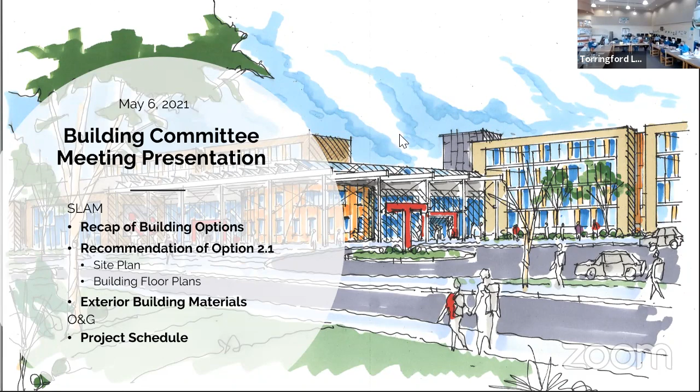This is a reminder of where we left off at the last meeting two weeks ago. We had talked about option one, which included a new field house style 3-bay gymnasium, and how that worked with the site, challenging us in that we would have a 2-phase construction period, and during that construction you would lose the space to have PE class.

So we also looked at option 2, which is a very similar layout of the building, but where the building ties into the site, we're able to incorporate a renovation of the existing gym structure and shell, and we would completely renovate the 2-story locker room area as well as the gymnasium. That would allow for a new middle school gymnasium to be built as part of phase 1 construction.

And while the remaining gym area, which is for the high school, is under construction, the high schoolers could use the middle school gym on a temporary basis.

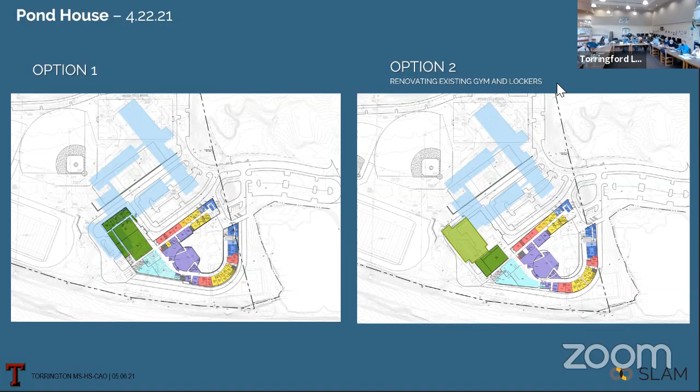We did our due diligence though. We didn't just simply go with option 2. We took a look at the site and how the buildings relate to the elevation and the grading, because site work will be a major part of this construction, in that the existing gymnasium and the existing main floor are at one level. The parking lot is lower, and the pond area is even lower.

So we'll have to really be careful about where to site the building in elevation. We looked at option 1 and tried to discern how much cut and how much fill there would be on site work if we were to put the building in this location. The first study had it at one level, and the other had a 2-story, sort of stepped version of the main level, but kept all of the building program on one level, stepping down between the middle school and the high school.

We then looked at similar options for option 2, saving the gym. This is a bit more challenging because the gymnasium is up at the high point, at about 672 grade elevation, and the pond is at 658 or so.

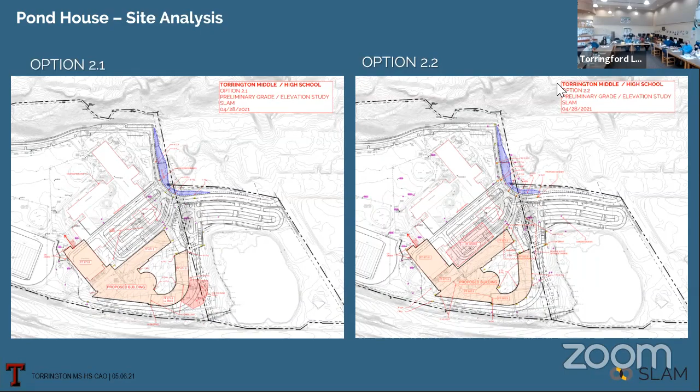Whereas this one, we're raising it up 6 feet and reusing the gym. By doing that, we're able to capture some lower level space in the high school wing, which uses the topography of the site more efficiently, in my opinion, and allows us to reduce the footprint of the high school wing, giving a little more efficient vertical construction.

But the size of the gym remains the same, correct? That's correct, as it is now. Well, which everybody really loved. Because we're adding a second gym, so to speak. If you take all the gyms—but that's for the middle school—the high school portion of the gym remains the same. Yes, the middle school is extra.

Just the only other thing I want to say is I respect everyone's opinions, but we are representing everyone in the community. And like the pool that we've never stopped hearing about, I would like to at least have a rational explanation for why we chose to renovate the gym versus a field house, because there are going to be a lot of people in our town, Torrington, that want a field house.

So I think we just have to clarify the terminology of field house. Because a true field house has a much larger presence and includes a track. This would not be a field house — this would be 3 gyms put together. It would allow more flexibility after hours, but it would not be a field house in the true sense. Let's be clear, 3 courts.

We should just stop calling it that. Let's stop calling it a field house, because that was probably our mistake — we started calling it a field house. Let's not call it a field house.

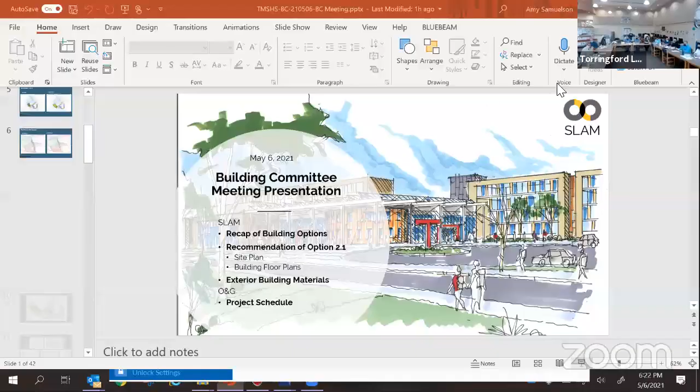Oh my God, you see the little piece.

Which photo do you want to start with? So I have a question while we're waiting.

You said the art and the ELC or pre-K is going to be on the bottom, but you also said no windows. There's windows in one direction where the grade slopes down, facing the pond, there's lower grade. And when they're in the corridors or courtyard, it's different. Maybe one of these other images can help explain that.

We'll get to this at the end. Facing the pond, there are windows. And on the courtyard side, in the lower level, it's a basement wall, so you only have windows on one side. The occupied spaces are the things that have windows. The core can have windows on the lower level only, on just that little lower piece.

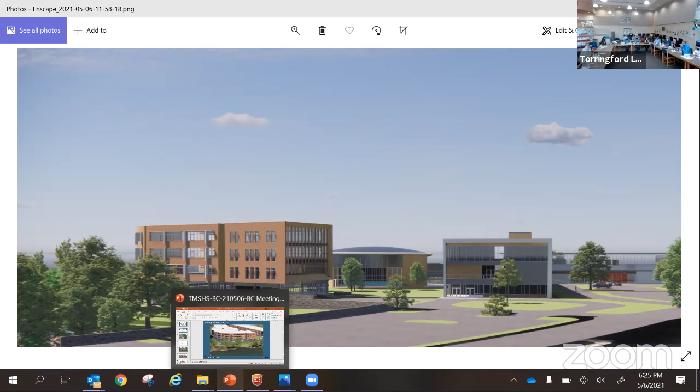We've started to see a facade developing for the building, and we brought some exterior materials. We're really thinking about using brick as a base material, a field material, so most of the school will be brick, with some wood composite laminate for wall accents to warm up the entire palette, and some different cladding material maybe for the lower level to differentiate it.

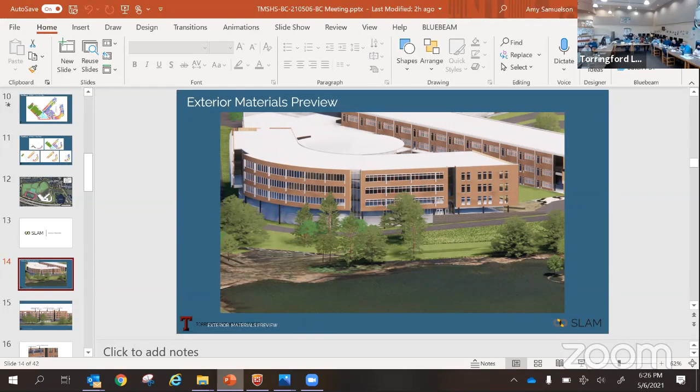But where's the wood? You'll see it in those recessed areas. We were thinking about wood where we have a recessed area with stairs. It's a laminated, graffiti-free and maintenance-free material.

We're providing windows in all classrooms and all offices. Some will be repetitive for the classrooms, and offices will be slightly different. But stairwells will be vertical elements with glass, so whenever you're going up or down floors, you'll have a view of the pond or surroundings.

Just a close-up on the detailing. We're thinking of placing a sunshade on the southern facade, just to protect from glare and sun, and adding some vertical elements to articulate the window openings more.

This is still in the making, we're still working on the facade, but this would be the view towards the courtyard, where you can see the auditorium, middle school main entrance, and high school main entrance. We're still thinking of having maybe a NanaWall or some way to open the stage so students can perform there, with an audience outside, or the community can be in the courtyard and listen to the concert. Yeah, that's a nice idea.

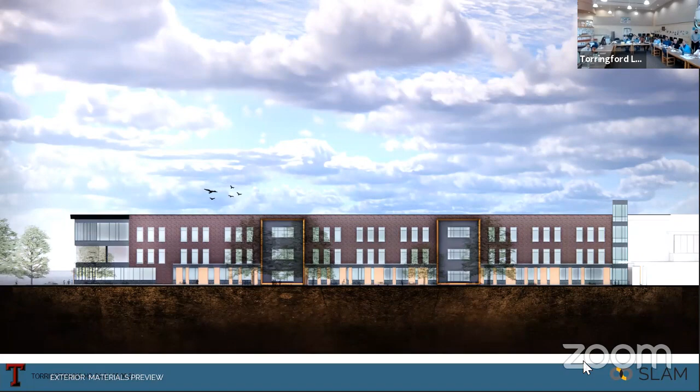These are some variations and explorations of the facade for the middle school with brick and some vertical elements, since we've been very efficient with those, having corridors and classrooms around. We're trying to make the facade more playful. This one looks at the facade clad in a different material, so we'll still look at a few options.

Possibilities include differentiating the middle school and making its facade slightly different from the high school, or making the whole campus more coherent with a similar treatment for everything.

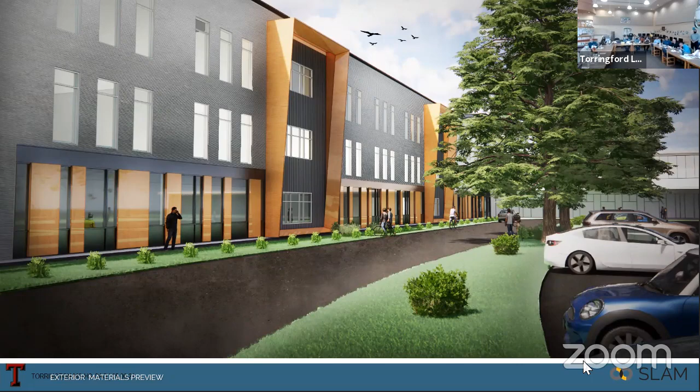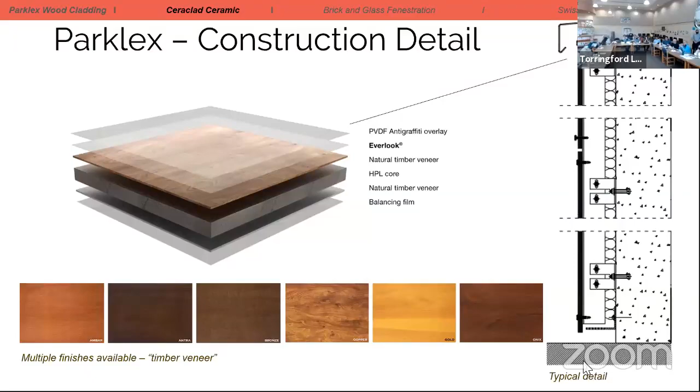Just a few perspective views of this facade that goes toward the gymnasium and community entrance to the gym. This one uses brick and some wood elements, materials we brought here. We think a play between warm and cool materials might be nice. Just a note on method of installation and warranty. We're trying to keep it simple, with a few materials on the facade, but to make it elegant and provide plenty of daylight and views for all classes.

Do you have any reactions to some of the materials we're looking at? Is there a comfort level with brick? We see it a lot in town, and on the other buildings. I personally like brick, I think it's beautiful.

Do you feel comfortable that we have enough budget scope, or that if we're off on budget we don't have to take things away? Is O&G carrying square foot cost to reflect the skin on this building? We're using materials we've selected in conjunction with O&G. We talked to them this week, and found brick to be the most common material and a good starting point. Since most of it is brick, we feel really safe.

Beautiful, at least I think so. My only concern with brick is the refacing we always have to do. That's just because of the age, like the Migeon Avenue brick structure. The whole project is probably 50 to 100 years, and it probably hasn't been repointed, plus the rain, and there are no gutters.

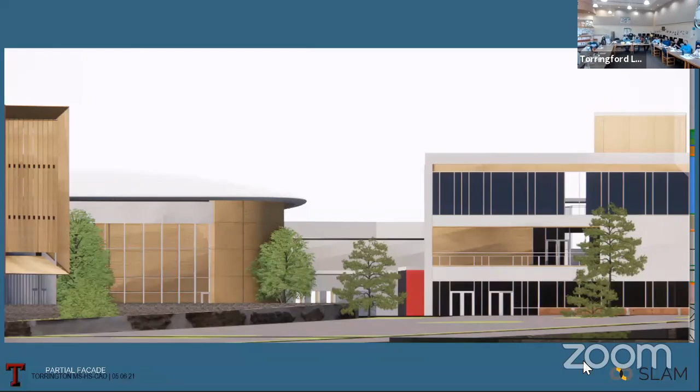I know, like in the building we're in now, there are so many entry points—God forbid anybody ever wanted to get in. So safety, I know we talked about it a little, but we're going to have a separate security meeting. It's on the agenda, so we'll talk about that.

In general, we are minimizing the number of entrances to the building. We'll just have egress per hall, but when we say the atrium can access the lower level, it's through the stairwell doors—we won't have doors on each classroom. The security areas are at the main entrances, where we have a double security vestibule, so nobody can pass straight through; they go first to the office. Yeah, I'm thinking of the worst case scenario.

The building has been designed in accordance with SSIC guidelines. We'll have more detailed discussion at the security meeting about the details of the glazing and some of the access control issues, like access control and security cameras.

So in the recessed areas, there's no windows on the side walls. But on the front there's a window wall. Anywhere there's a recess, there's no windows on the side walls, because if we have front glazing on a stairwell, we cannot have windows next to it because of fire rating. Those are egress stairs, so we can show you in the plan.

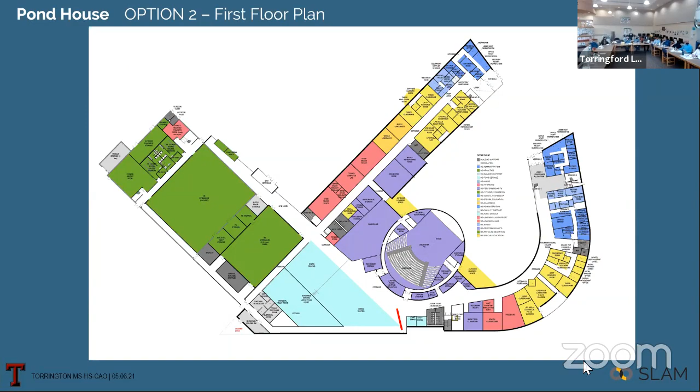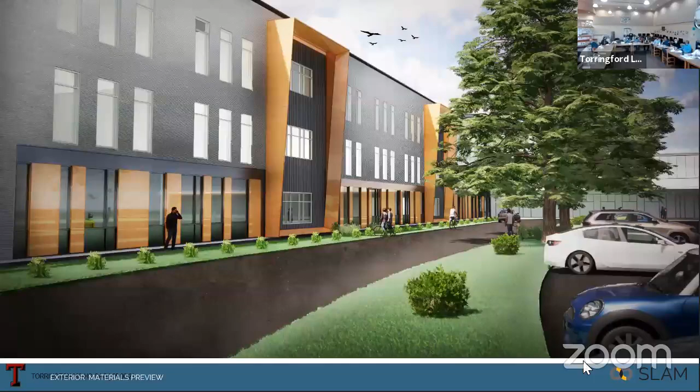Just to clarify the difference between Hardie and what we're suggesting: this already comes pre-coated with a ceramic coating, so it's much stronger. You don't need to repaint it on a regular basis. But versus the brick, in 25 years will we have to replace that? Will it be worn out because of mold and mildew? I have to really look at it, I just don't know.

Does that mean they will replace it within a 20 year warranty, and after that you will have to do it yourself? The warranty is probably for the finish, right? Yes, just the finish, but this will last more than 20 years. The warranty for the substrate is 50 years for this product, the Ceraclad, which is the commercial version of Hardie, and then 20 years on the finish. So potentially you could refinish it, but I'd have to ask the manufacturer. It also depends on the environment - where is this built, what's damaging the finish? If you were down by the shore and salt water was attacking it, it might be a shorter duration than here.

So that's why, like, placing wood in a recessed wall, it's less open to rain and things. So that black one - it's actually gray, that's the outside?

Yeah, this is Ceraclad, and that's just one option. It comes ridged like that, it comes flat, there's a number of options and colors. But only gray? No, it comes in white too - I think there was a white sample that we passed around. Yeah, there's one here. It comes in a range of colors.

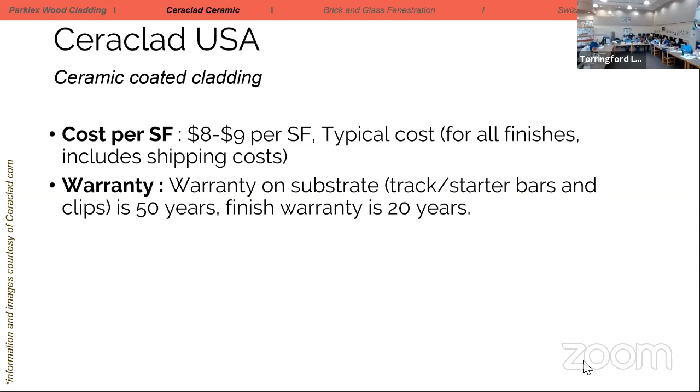So our fallback for the other material that contrasts with brick can be ground CMU concrete block, which we've also used. If it's nicely finished, it still can be nice, sometimes it looks like terrazzo. But we believe we do have a budget for this material we're suggesting, because the field is brick - majority of this is brick. We did the school in Hartford from the 1930s, and brick is still beautiful. They repointed it - brick is gorgeous, it'll last forever.

So I think using these materials as an accent is really the way to go. That way you have the field of brick, and we can talk about various colors of brick, but they're used to break up a larger mass, and they're used sparingly, as an accent material.

I think brick is very classic, and it still represents that we are very steeped in tradition. It's very important to us in Torrington, for the Red Raiders. They won't be happy if we don't pick the right materials.

Because it's contaminated, we need something new. But that other material doesn't come in the brick color. Yes, this material also comes in a brick color.

The other one with the ribs, with Ceraclad ribs, I don't know. That one we can have in a custom color, but I don't know why you would want that - it wouldn't be an accent if it were next to the brick.

Is that the accent? Yeah, not that - that just replaces the brick. Okay, gotcha. Right, like in this area on the walls. Oh, I see, I see. Well, it's just me, I don't get it.

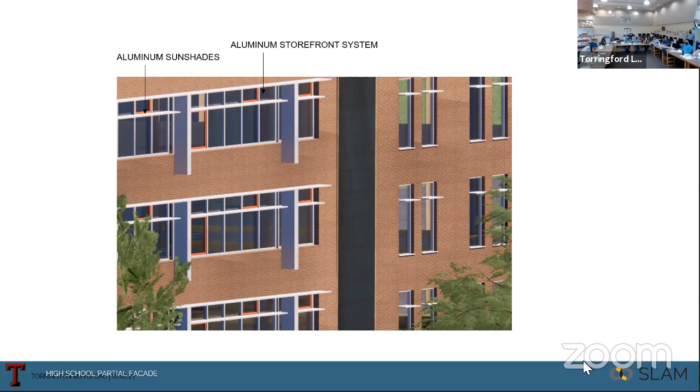So if I go back to here, that might have been a zoomed in portion of one of these areas. And then you can see that where there's a stair, there's glass on that face wall of the stair, and the side panels would have that accent. In this case, we're showing the accent as the wood substrate.

We can bring it in so that it's continuous from the stairs that you're looking at, when you're inside the stair, the same wood finish could be on the interior. When we go look at Career Academy, you'll see some examples of that - Julia did a beautiful job there, not with wood, but with a similar application where it came in from outside.

What would the middle school look like - what's the difference?

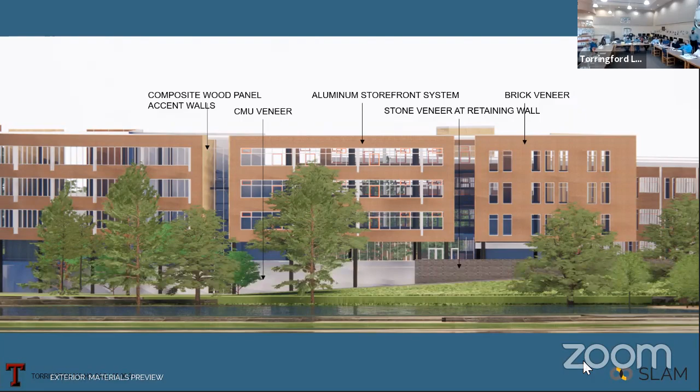We just start looking at this facade, and we are using different fenestration here - it's more vertical. And that's all brick. This one is brick too, it's just all another rendered color, a dark color. It's the way it's rendered - it's just not as bright. But yes, this is a field of brick.

The lowest level, we're looking at accenting with other materials, so as you're walking by, it might be something different. And we still need to coordinate between the floor plans and the elevations, where we have offices, so we will have slightly different windows than what you see at the typical classroom.

So the entrance to the middle school - is this an entrance or just a sidewall? No, this is just a sidewall. So do you want to go from one sidewall to the other? The middle school sidewall and the high school sidewall will look different.

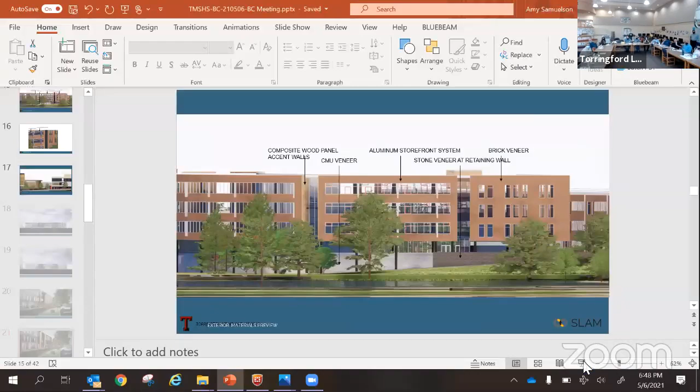Yeah, that's their idea. We're saying that's one of the possibilities we'd like to look at, making a very strong distinction, and then maybe one that's less strong. You'll have an opportunity to see both.

Here the upper floors are cantilevered, so there's an overhang underneath. When children on the lower level are going out, they'll have a porch above their head, which is nice. We're looking at more transparency and wood accents at the main entrances. They'll be similar in framing and articulation, but still different. The high school is taller, with almost a seniority-like treatment.

Where's the rooftop deck? That'll be covered by panels, if we have enough of it.

Being slightly different, when you talk to a new parent, the middle school is the one that looks like this, the high school is the one that looks like this at the entrance. You'll be able to distinguish them, and there will also be signage, and possibly colors, though I'm not sure if the school colors are the same. We'll work on that, but not right now.

In the design process, I see some of those porch-like overhangs on the big tall buildings. Those will be aluminum or a similar product so we don't have to worry about refinishing or replacing them in 10 or 20 years. Ideally, it will be something we don't have to worry about for 60 or 70 years. Everything metal that we select will be a very durable material.

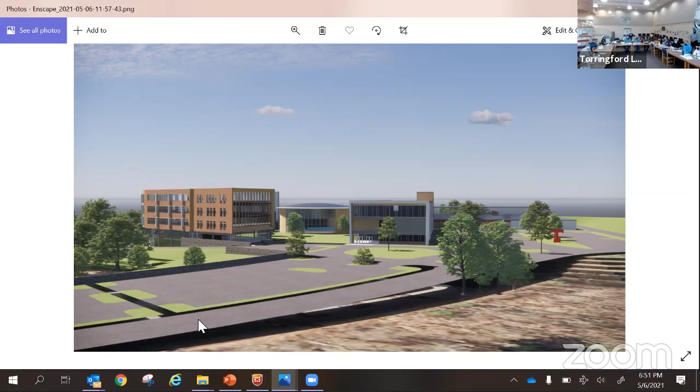A lot of detail, thank you. Sure, there's more to come, we're just at the tip of the process, starting it, but we look forward to bringing you lots more options to choose from.

Can you send me this, because some of those pictures aren't here? Yes, I can send it out. These three images I just walked through aren't in the slideshow. You mean the ones I screenshotted? Yeah, I did. Oh, you did? Okay, Ally already stole them, don't worry. You can send them to me? Okay, thanks, I can send them as a JPEG if that's cleaner, that'll be easier. Yeah, you can do that, so I'll send it out.

What is the other alternative to the brick on the outside, were you saying? We're suggesting that brick is the field material. I don't think we'd suggest a different material, except that concrete block is less expensive. It's cheaper looking, and I wouldn't want it to be the main field of the building, but we could use it as a substitute for accent areas if needed.

We also sometimes use glazed brick for accent walls, which can be nice, durable, and acceptable. A glazed brick is simply coated, it looks like finished paint on brick, but it's actually baked with the brick, so it's a solid material. It looks almost like ceramic tile.

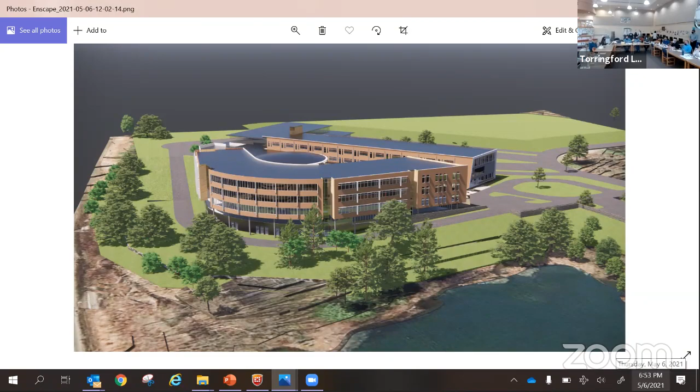Okay Laurel, thanks, you're up. Amy, thank you. Okay Dave? Yeah, I'm gonna stay, get to another meeting, so I'll take care of the schedule, okay. That's where we are. Yes, I'm just gonna pull up that slide for you. Are you tired, Gary? No, actually this was good tonight. Thank you, without the cookies it's still good. I didn't say that. Casey was concerned, John was concerned, I was concerned, the budget's tight. Everybody brought cookies, I know, you and Ally did.

Dave, you're up. We've talked about our initial schedule and where things have come as far as the programming effort and time spent on that. We've been spending quite a bit of time as a group with SLAM and CSG, talking about the schedule and where we see ourselves going through the rest of the design phases, and when we actually see construction starting on site.

So this is a real simple overview, a condensed version of a 5-page schedule we've been tracking throughout the process, somewhat similar to the format we had in our presentation view. The idea here was to look at two different ways to approach the schedule getting us through pre-construction: one is a more standard approach, and one is an alternate.